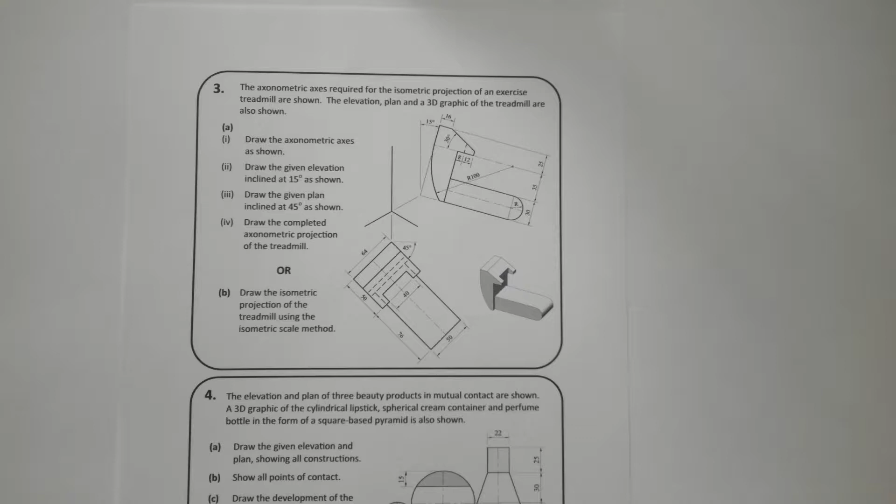Okay, so welcome to this video on isometric projection using the axonometric axis method. So we're focusing on 2017 Section B question 3. So the isometric projection of an exercise treadmill is shown, okay, and the axonometric axes are required. So these here. The elevation, plan and 3D graphic of the treadmill are also shown.

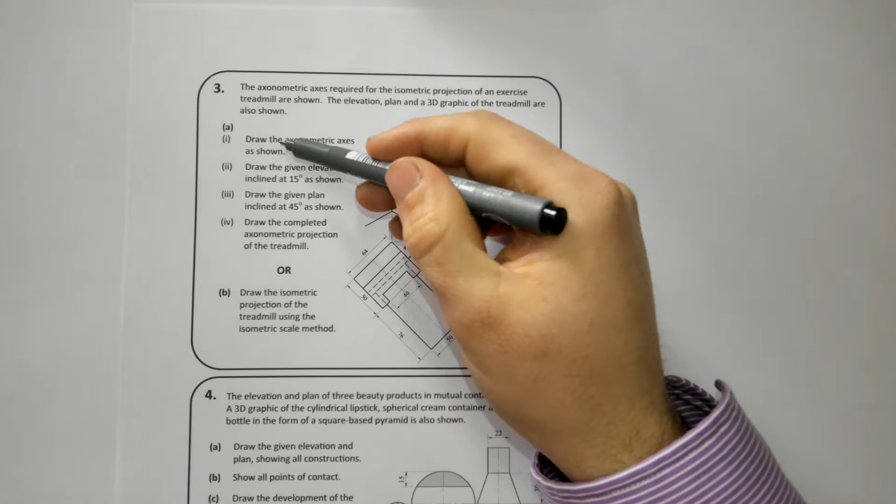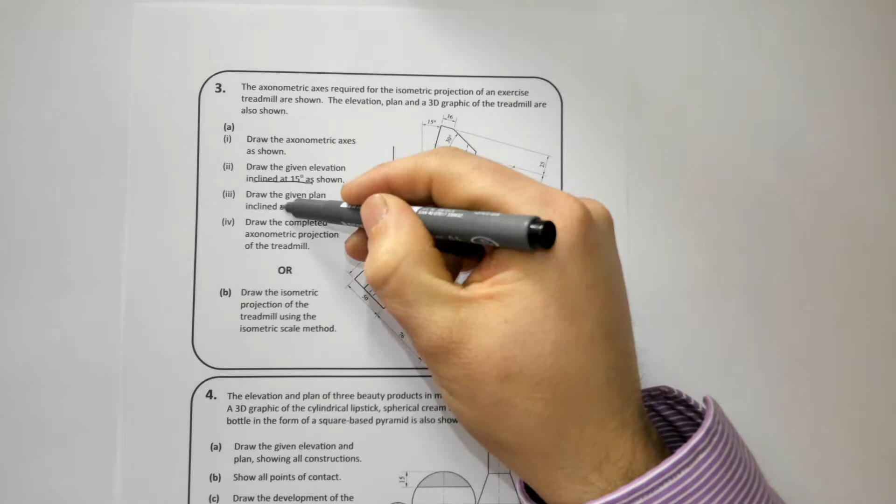So draw the axonometric axes x, y and z, draw the given elevation inclined at 15 degrees as shown, draw the given plan inclined at 45 degrees as shown, and part 4, draw the completed axonometric projection of the treadmill. So we'll deal first and foremost with the axes. Okay, so our y-axis just goes vertically up our page. Our x-axis is going at 30 degrees and our z-axis is going at 30 degrees the opposite way.

Now, okay, I'm going to set up the views. I'm going to measure down 25 for the bottom of my equilateral triangle, line across here until it hits the axis, 60 degrees here, and 60 degrees once the baseline hits the axis. So 60 degrees there. Now, what I'm showing you how to do is set up the elevation in its required position.

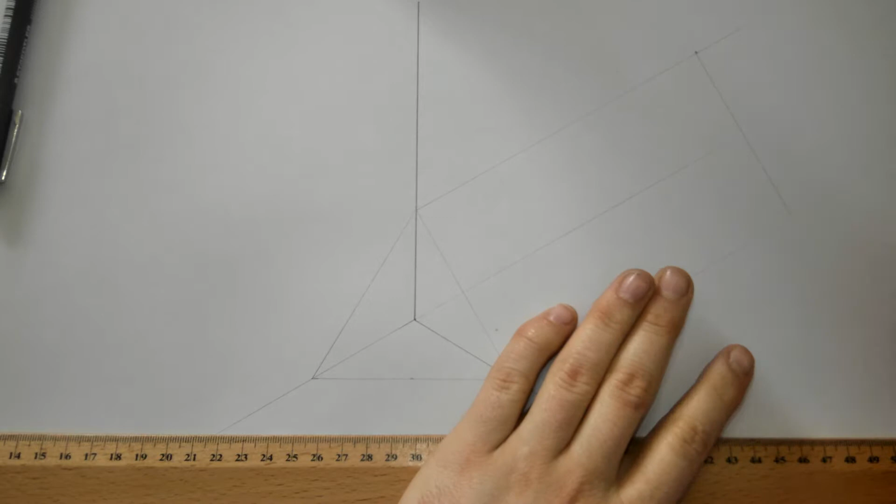So I'm taking 30 degree lines from the corners of my equilateral triangle, and I'm going to extend on my axis as well. Now, those lines can go on for any length, and I can measure whatever distance I want out from here. To make it easy on myself, I'm going to measure 140, and I'm going to draw a line that's perpendicular to here, so it's parallel to that set square, so it's a 60 degree line. Okay, now I'm going to take my compass and draw in an angle at 30 degrees.

So now, you draw in a semicircle there, and if you notice, if I drew that in, it wouldn't be meeting there at the end, and it should be. Alright, so what am I going to do to overcome it? Well, I can check my lines here to see if they're out a small bit. If they're not, what I'll encourage you to do is bisect the angle. But really and truly, the x-axis where it pierces them should be the bisector of the angle, but it's just slightly off. So here I have it there.

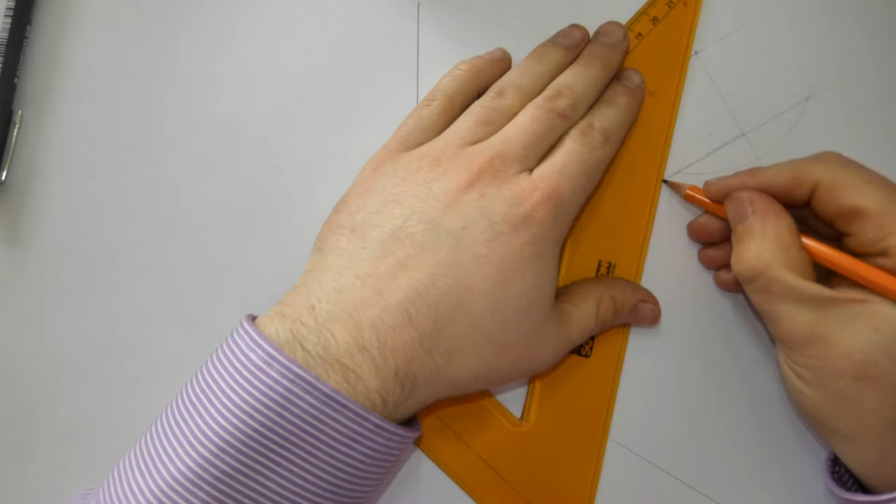Now I'll draw in my semicircle. Now, where my semicircle pierces the axis here, I'm going to join that to the corner, and this over here. So I'll move my visualizer there for you. Okay, so my elevation is going to go in here.

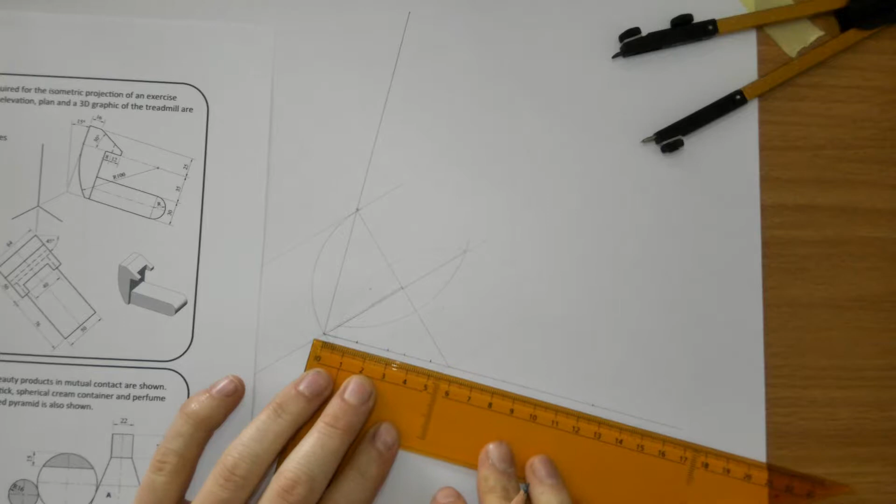Now, the length of this object is 50 plus 76, which is 126, and 50 there. Okay, we can see a 12 and an 8 and a 16. So I'm going to go 12 and 8 is 20. I'm going to go 16 from the right. Okay, so these are dimensions along the bottom. Now, you need to bring them upwards. So I'm going to bring them right up there using my sliding set squares.

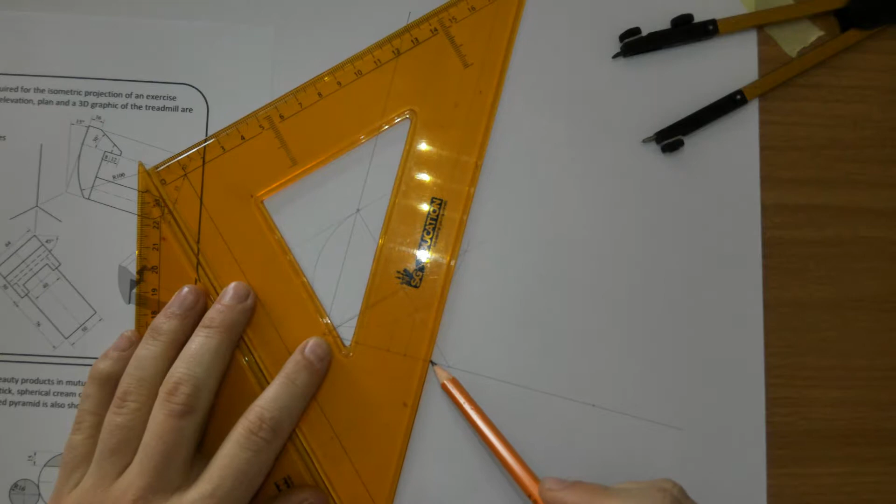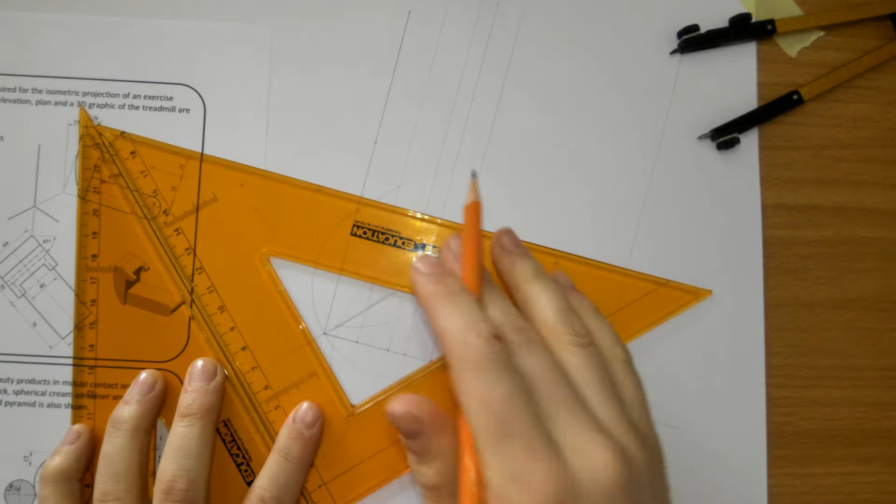Okay, now we have our dimensions here to mark along. So 30, 35 and 25. There's the dimensions to mark, and now we have to bring them parallel to the base. So I've brought them parallel to the base. Now I'm going to start heavying them in.

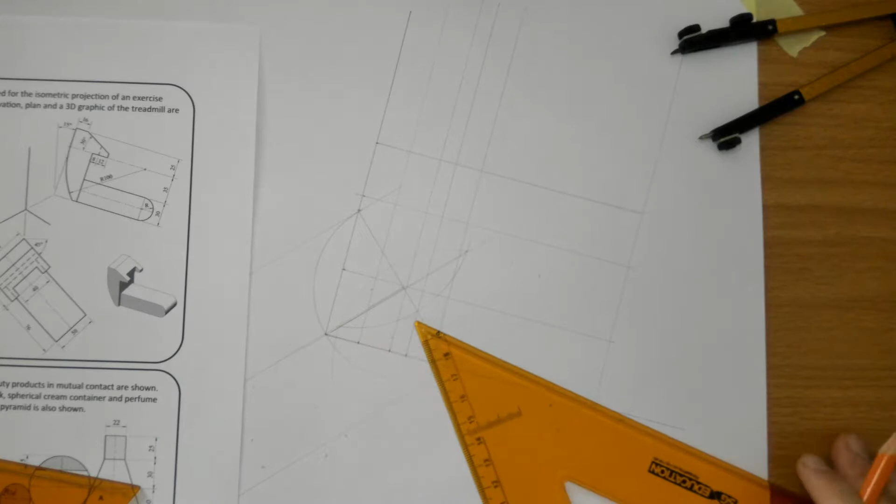Okay, now a difficult thing to do will be to find the curve. Alright, so find the curve here, but it says it's radius 100. So I'm going to measure over radius 100 from here. I'm going to take my compass. There. And, oh, sorry, I've moved my compass there. There we go. That's the arc there. I'll get rid of that. So there's the arc drawn in.

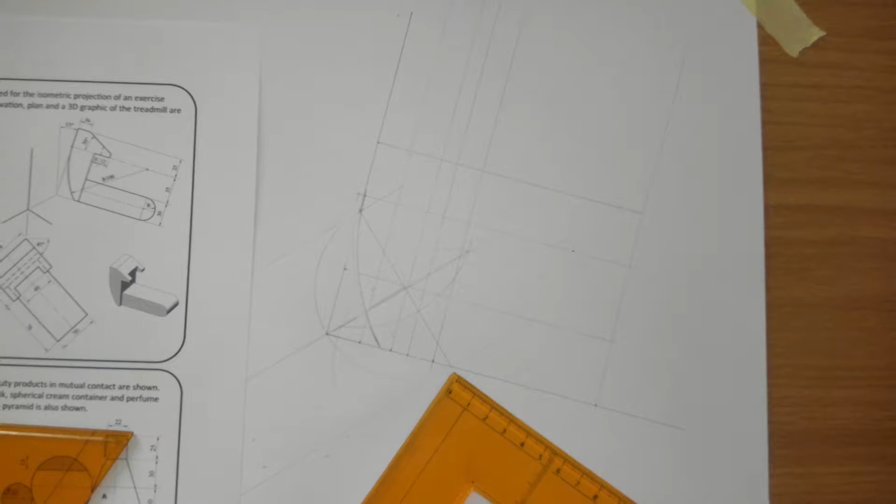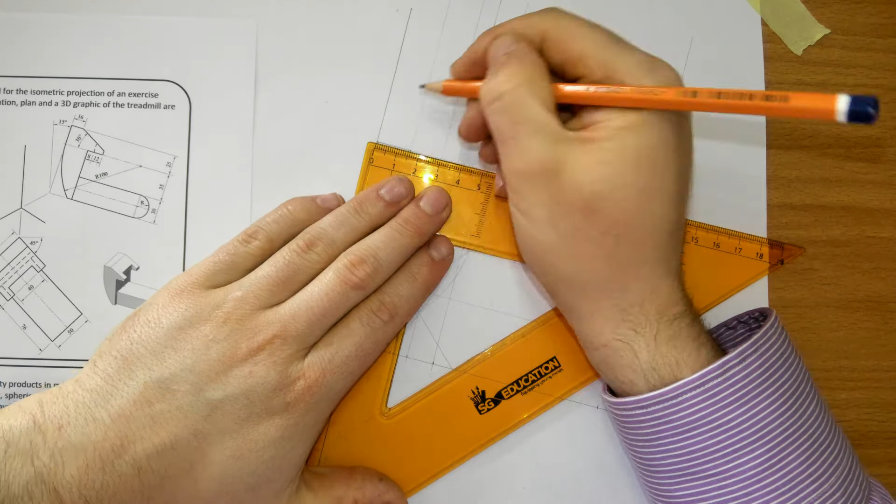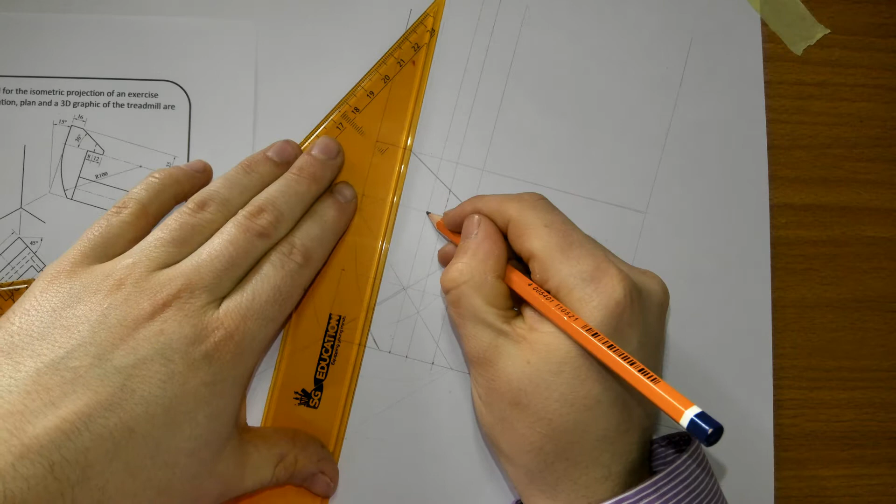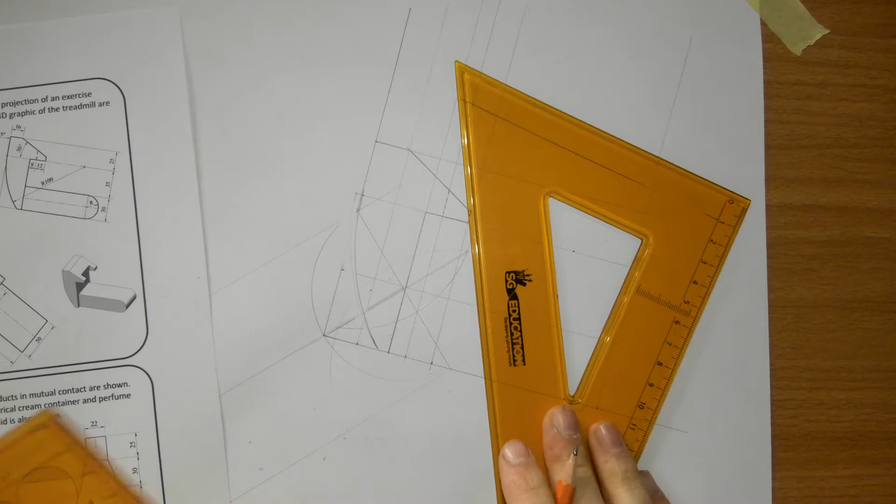This is heavy. Okay, now we need to figure out where this curve is. The diameter is 30, so this center point is in 15. So I'm going to measure in 15. So there it is there, the center point. There. And now we'll get going drawing in the curve.

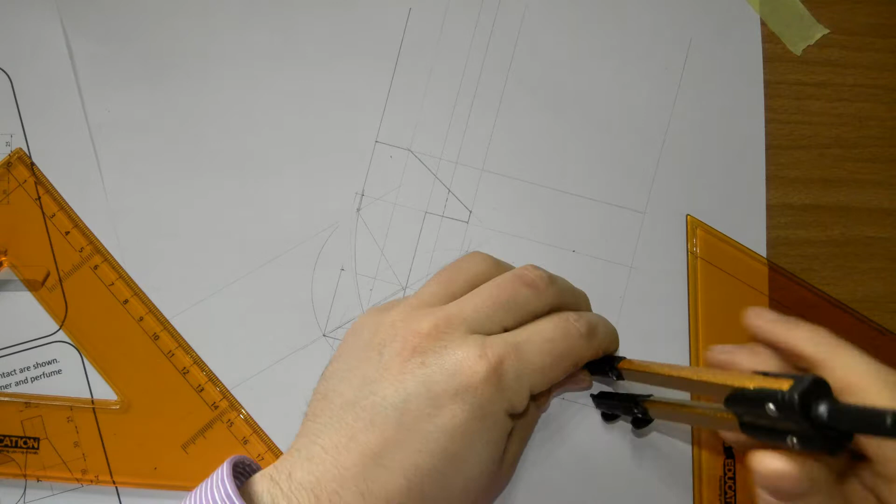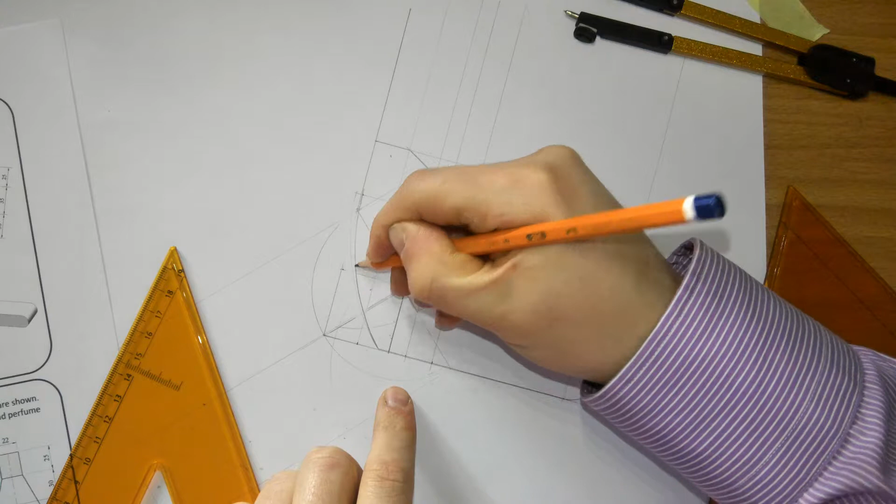So there's the semicircle drawn in. I can heavy in this line here, from here, and I'm just going to darken that with my hand to make it easier to see for you guys. Okay, so that's my elevation. Okay, completed.

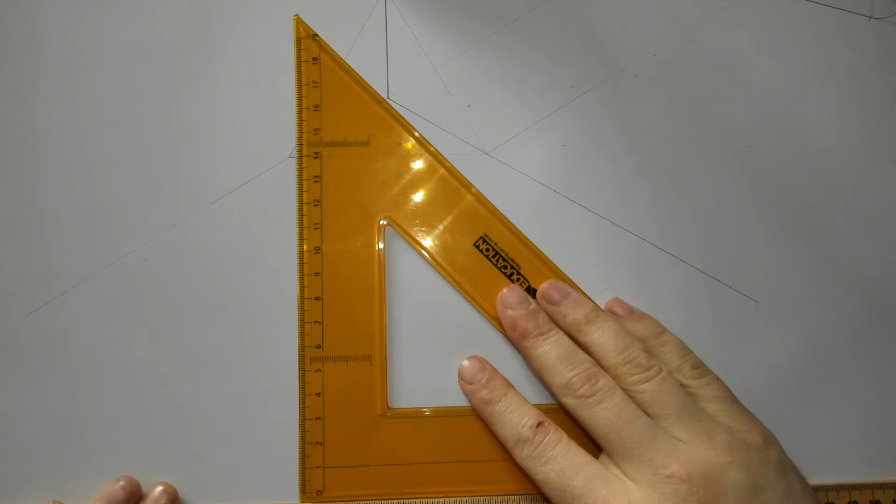Now I'll teach you how to draw in the plans. I'm going to move the visualizer and show you how to draw in the plan view. So I'm going to project the two corners of the triangle down.

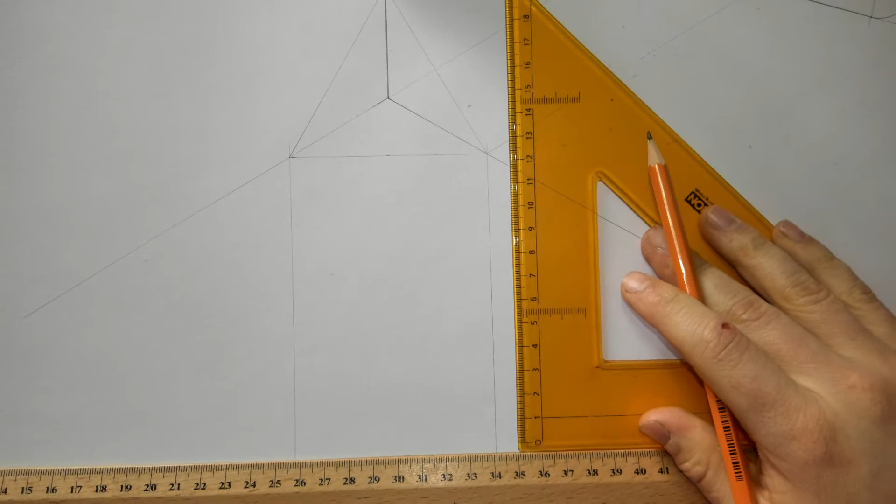I'm going to go down roughly about 8 centimeters from that line. Okay, no, I don't think that's enough. Right, I'll go down 6. So going from there to there is 6 centimeters. So I'm going to draw a line here. Okay, I'm going to bisect that line.

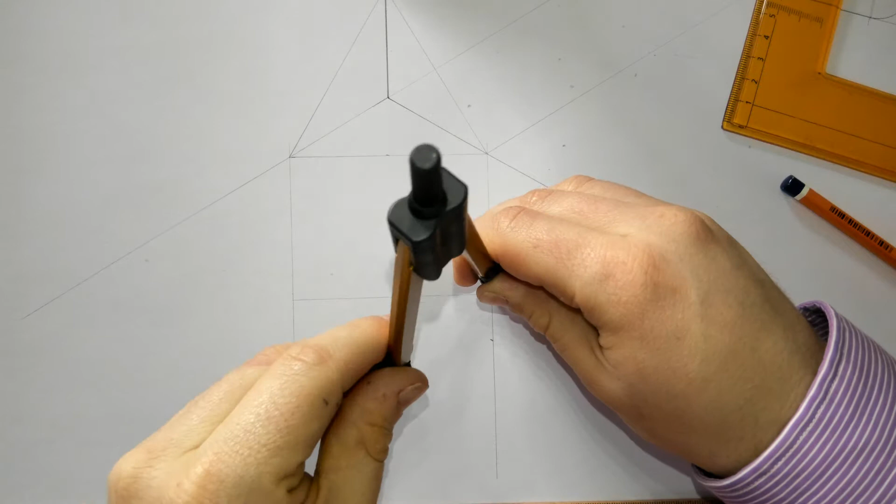Now, I'm going to get my compass here and draw in a semicircle. So this is going to be the orientation of the plan view.

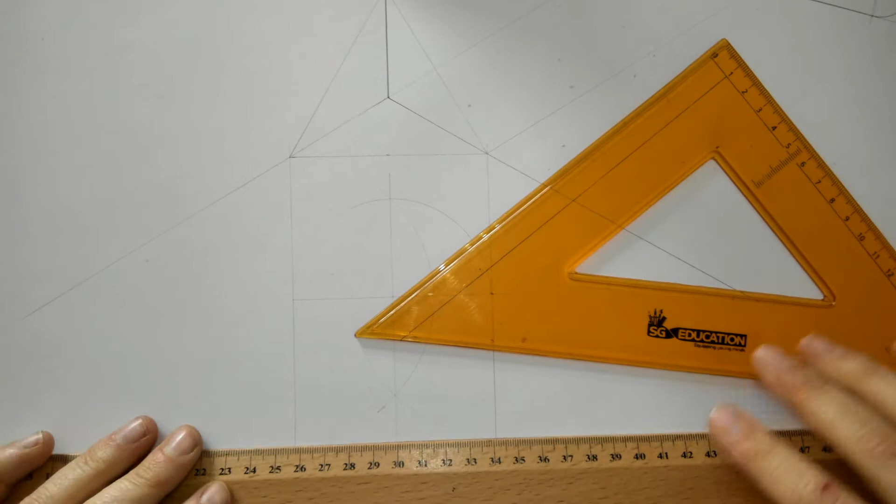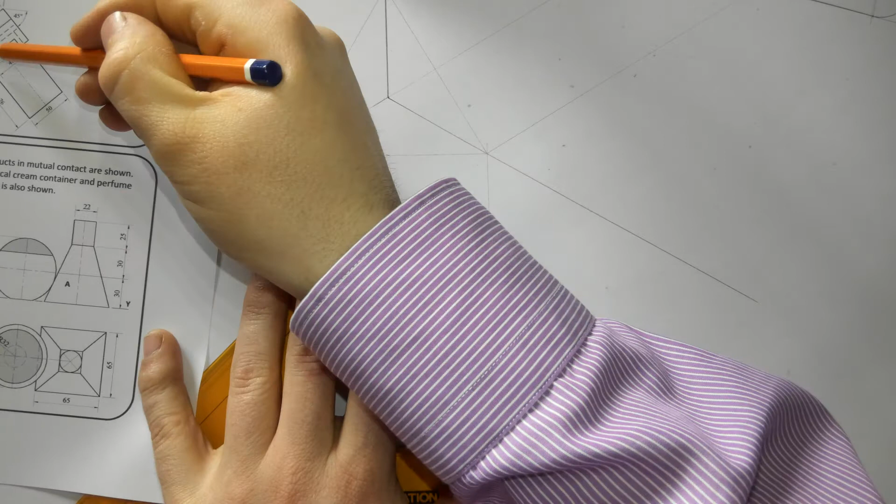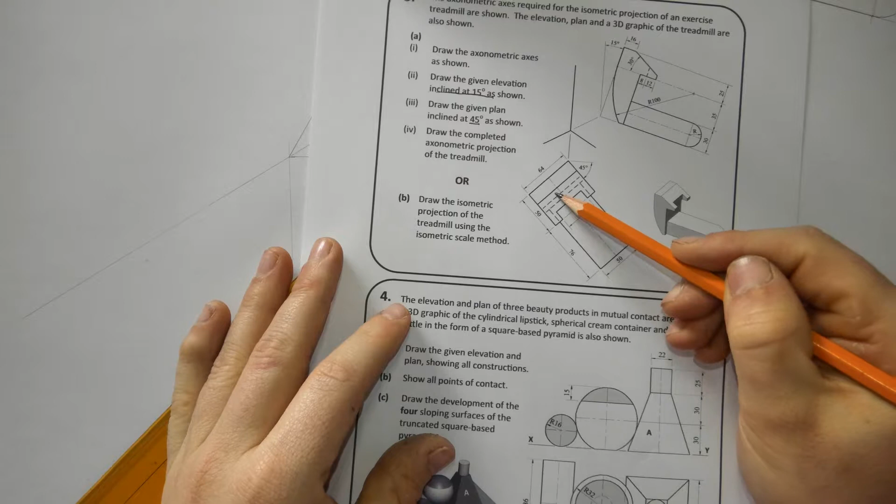So it's length 126 again. There's a 50 on it, and then there's a 16 here, and then we're going from the 50 going 12 to the left and 30, and then we want to figure out the distance between there and there, and that distance is represented by this distance in elevation.

So we go up to our elevation and we take this distance here with our compass. Okay, lift your compass. So back in plan view, we go over to our 50 mark and work 20 inwards, and then mark it right there. That's it there.

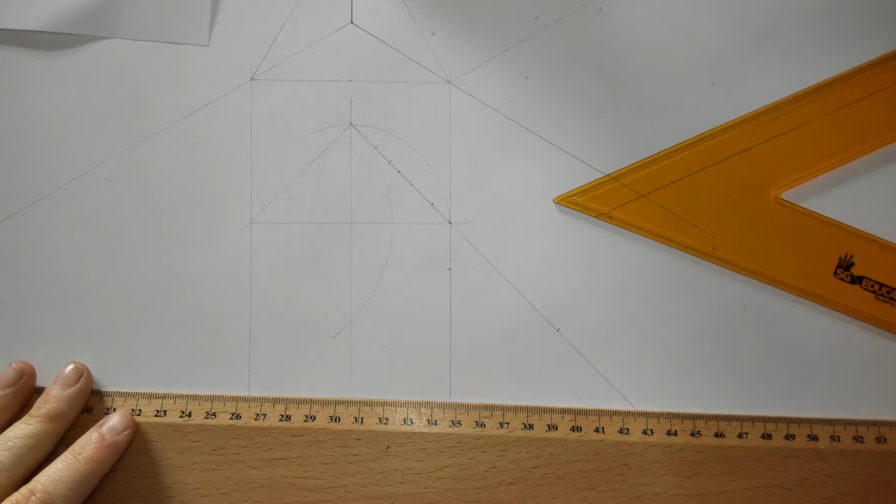Okay, now we can draw lines in for our plan view, and the width of the plan view is 64 and 50 respectively. So I'm going to measure 64 here. I'm going to find the center of it, and then I'll measure 25 either side of it. So I can bring my light lines down here.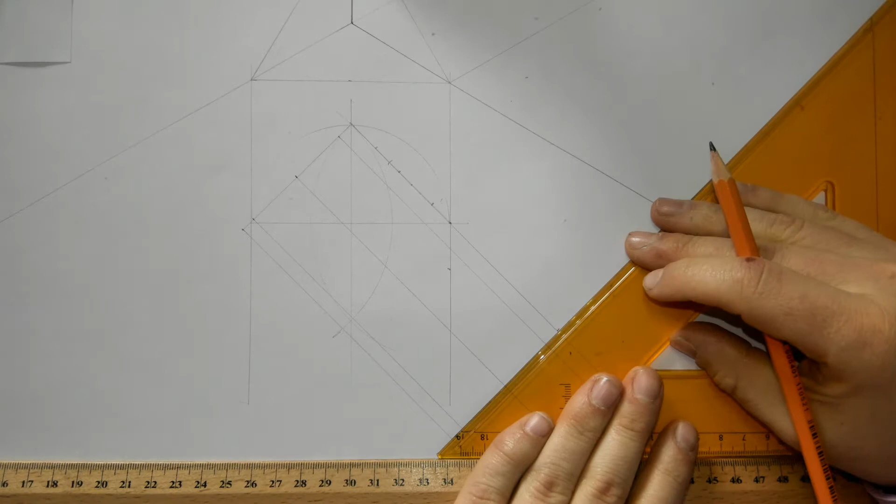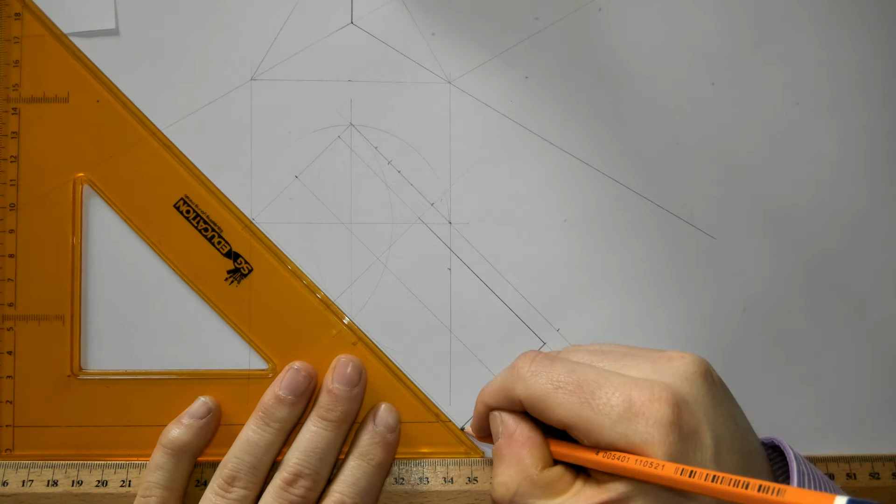Now, heavy line there. Heavy line here. Heavy line here, and then we've got a little space out here to do the 40, so 40 divided by 2 is 20.

Now, excellent. I love those students.

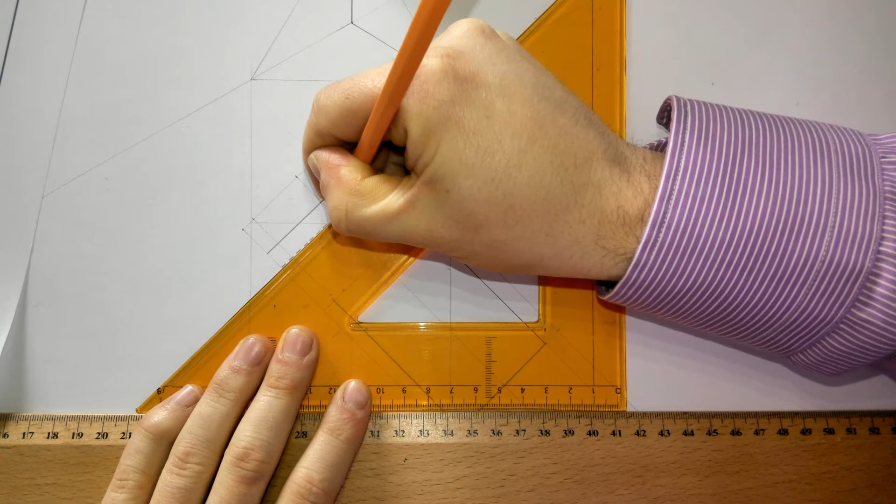So back here, I'm going to draw in these lines. Okay, this one is heavy. The underside line here is hidden. And then we have another hidden detail line. And then we have a heavy line going to the 12.

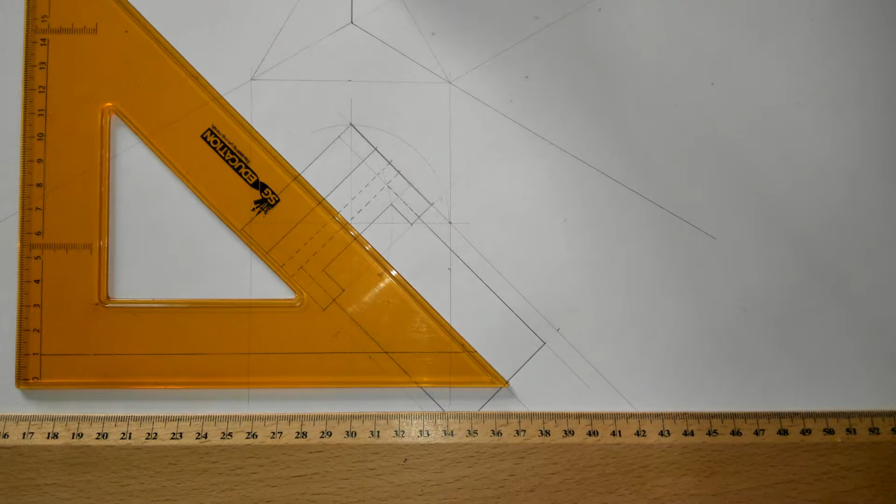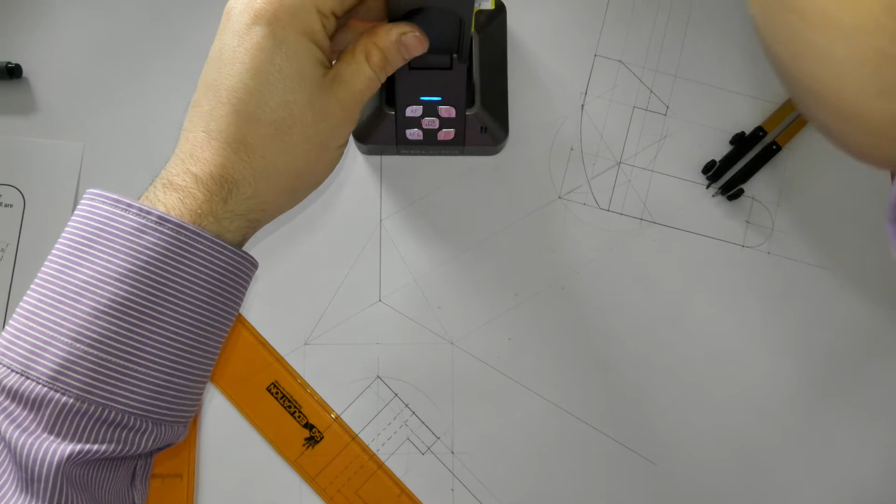There we go. And then there's a hidden line here. Right, so that's our plan and elevation completed. Alright, now we need to draw it in 3D. So I'm just going to raise this camera here. Now I'm going to pause and fix the camera.

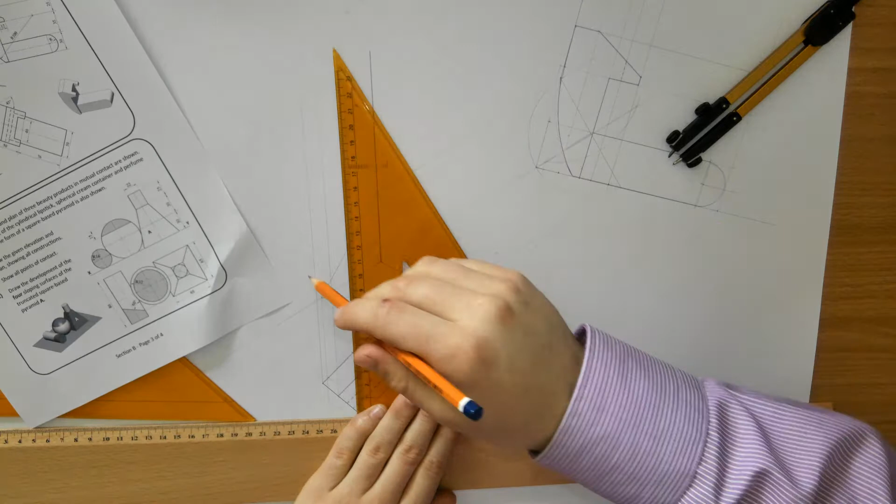Okay, so I've adjusted the camera and I'm going to start drawing the 3D model in. I'm going to solely deal with this front surface here. So I have to establish my points here: 1, 2, 3. Points in plan represent the whole face. So I'm going to bring the 3 points I want up from plan.

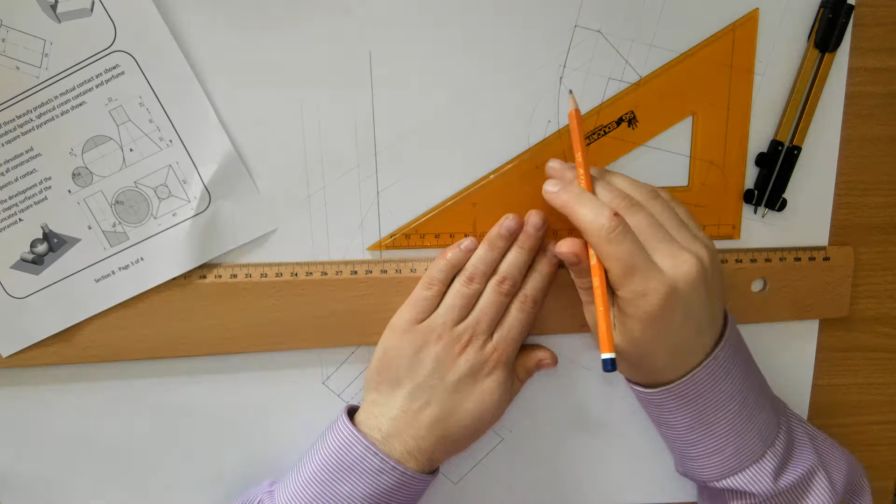Now I'm going to bring these 3 points down. So now I have 3 points brought down. So look, when these match together, there we go, these and these. So I'm going to heavy them, and now I've 2 lines drawn there.

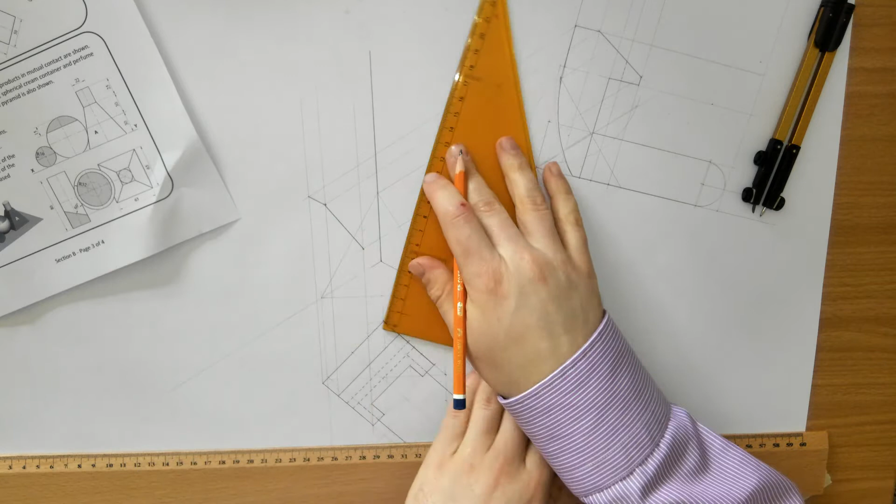Now I want to get a bit more complicated to get that bottom point there. So I'm going to bring this one right down and heavy up here. Now I'm going to bring this point down here, and its hidden detail position in plan is this one here. So I'm going to bring that one in plan straight up, and then we can connect them together.

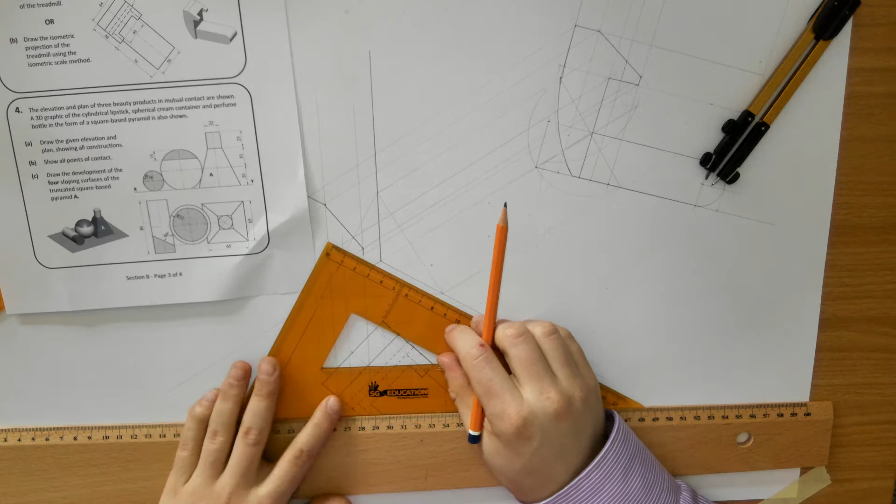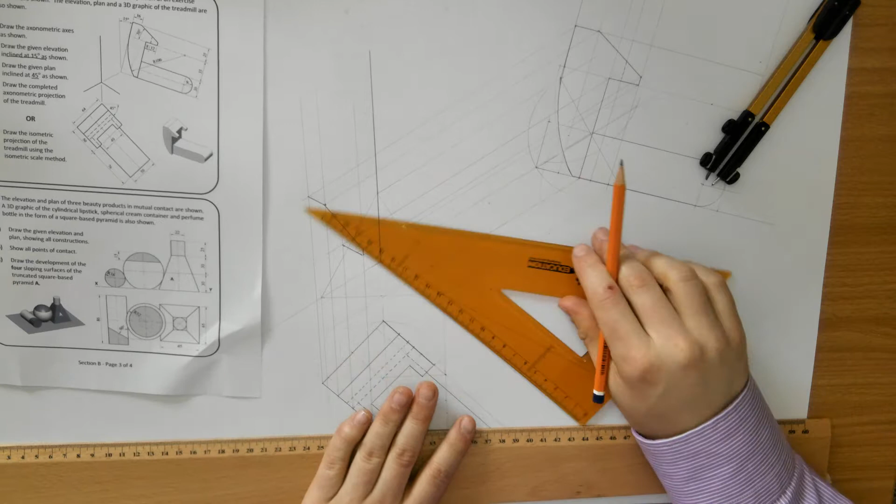So there we go. Now I'm going to try and get this line in 3D. So that's it there in elevation. So I'm going to bring this straight down, and then it's already brought up there from plan, so I can literally heavy in from there to there. Okay, and if I want to get this very small bit in 3D,

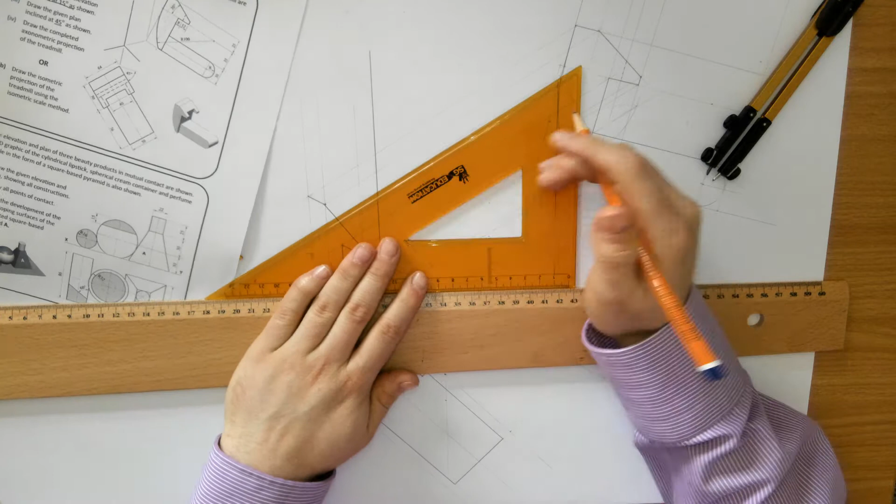bring the point down, bring its position up from plan, which is here, until they intersect, and there you have them. Okay, now I'm going to bring this point down. Okay, that one is brought up already.

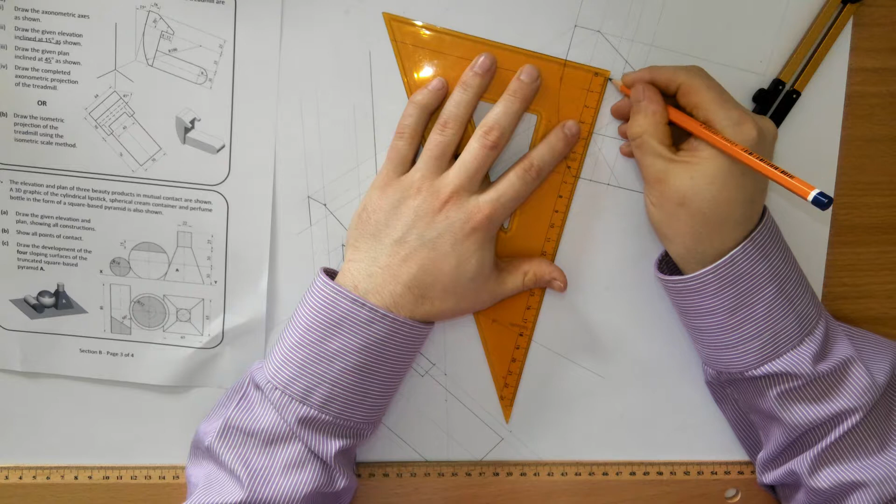So now I have everything on that face but the curve. So I'm going to teach you how to do the curve right now. Okay, we're going to establish a series of points on a curved surface. So, because we have an elevation and plan, we're going to mark along here at the bottom, every 5. So 5, 10, 15, 20, 25.

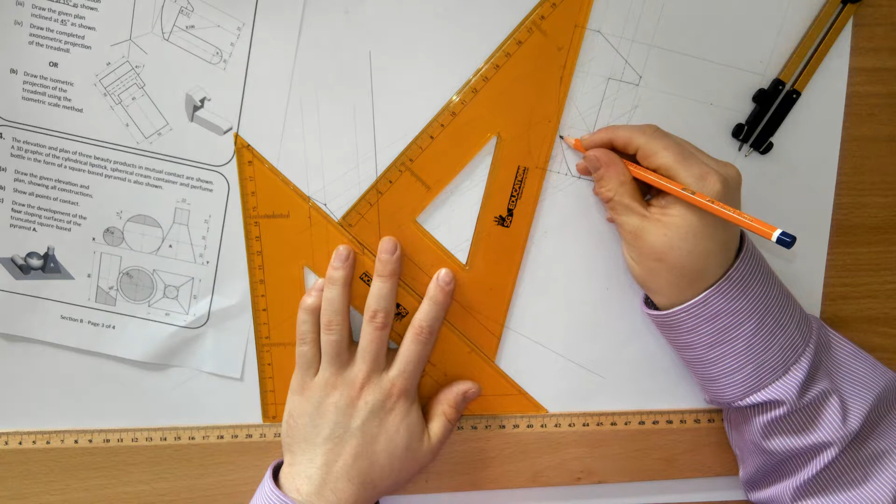Alright, so I've marked those points there. We're going to bring the points upwards until they hit the curve. Okay. So I'm going to bring them up until they hit the curve, like I am there. Now, if we've marked along 5 here in elevation, in plan view we're marking along 5 here. So I'm going to mark 5, 10, 15, 20, 25.

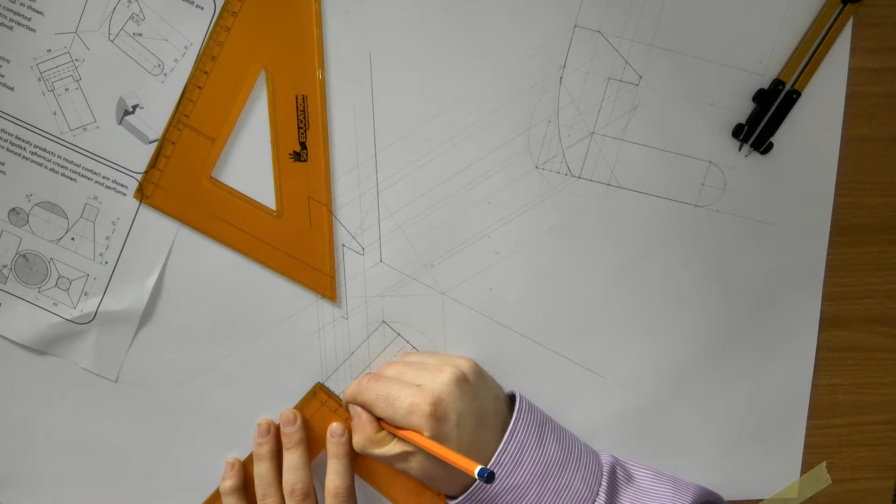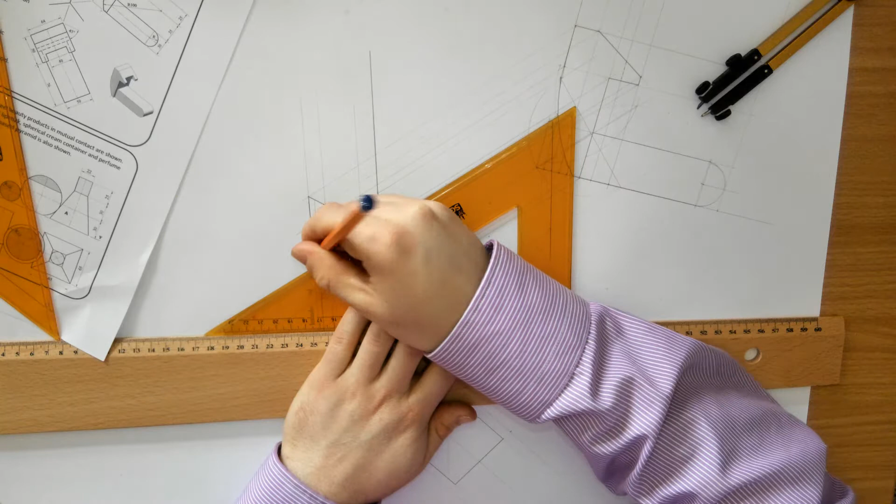Now I need to bring them up respectively. So the first one we bring up from plan, the first dot. The first one here from elevation, we bring down. So we bring that down. And that's the point on the curved surface. Now the second one we're going to bring up, and we're going to bring the second one down. So there's our second point.

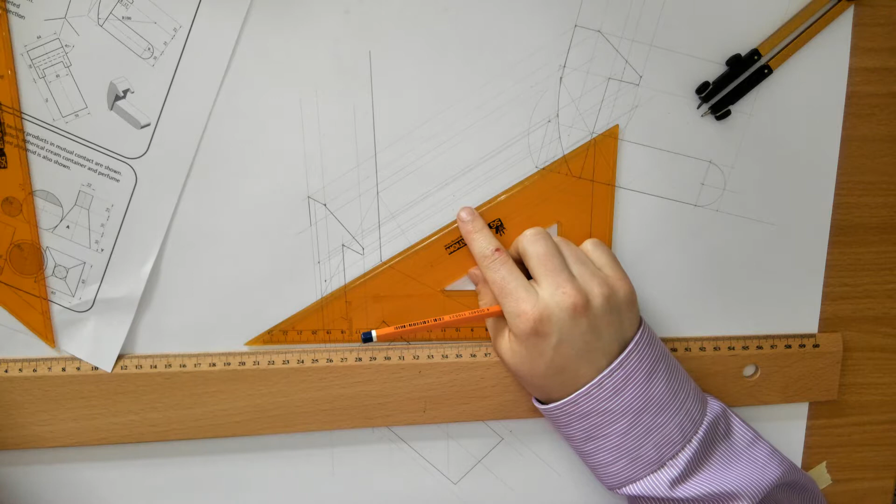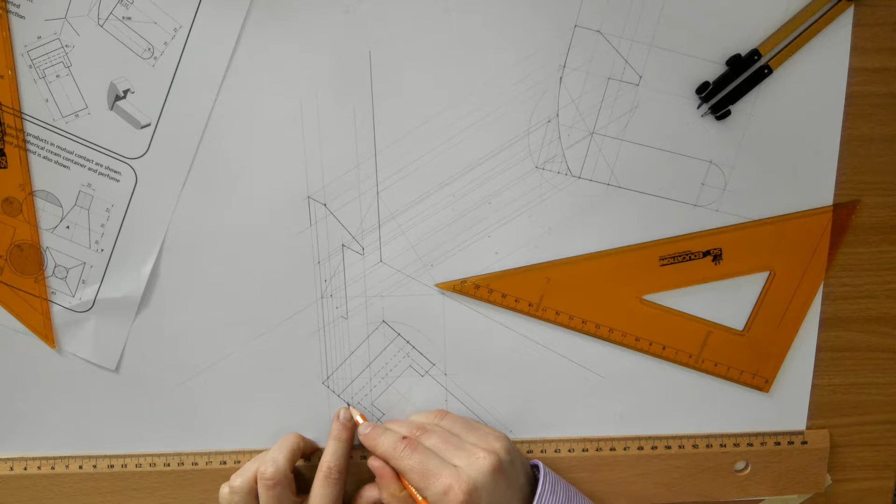Now the same with the third one. We're going to bring the third one up and the third one right down. Now we'll do the same fourth one. So the fourth one is here. And that's it there. And the fifth one should be bang on there, the hidden detail line. Okay, so we're going to freehand sketch them in. So that's the one curve there.

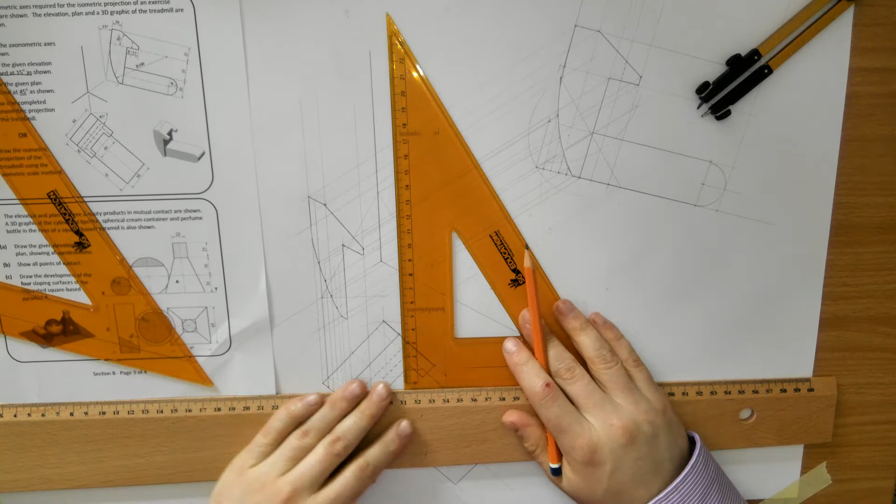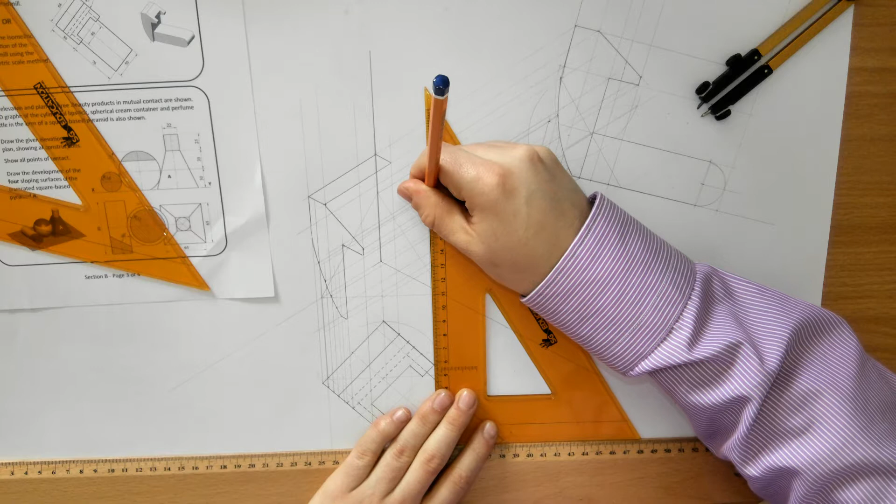Now I'm going to do the top surface here. Okay, so there are my two lines brought down. So I'm going to bring just these two up until they intersect each other. I'm going to connect them together. Right now, this one here, I'm going to bring a point up and have it between their relevant lines. We go and join them to their relevant places. So they should join here. Now I'll deal with the cutout.

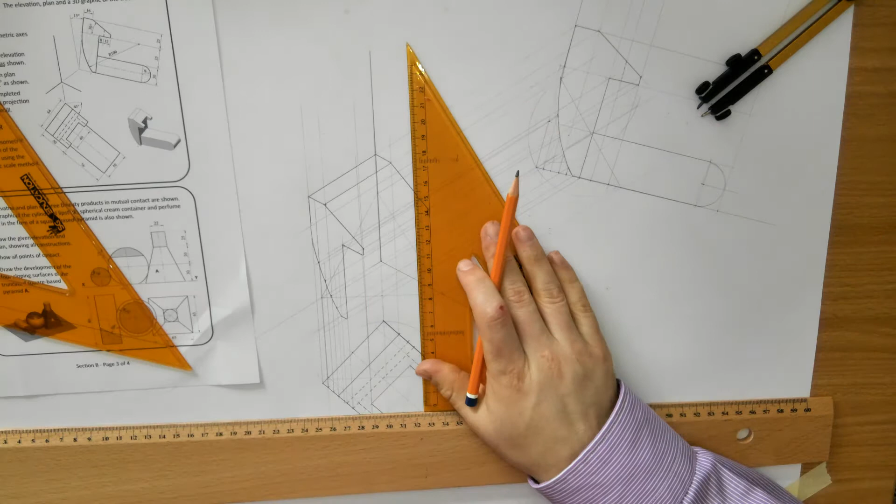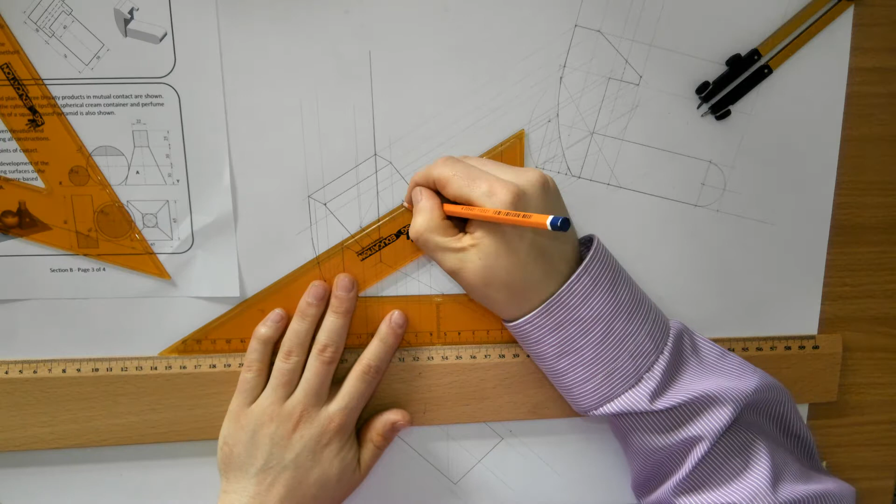So bring that point down. It's where they meet. Okay, and then the point here they meet at. So I'm going to join them together. Likewise over here, let's come up, put it up there. And then we can join these together. And we can't forget now to do our inside bit.

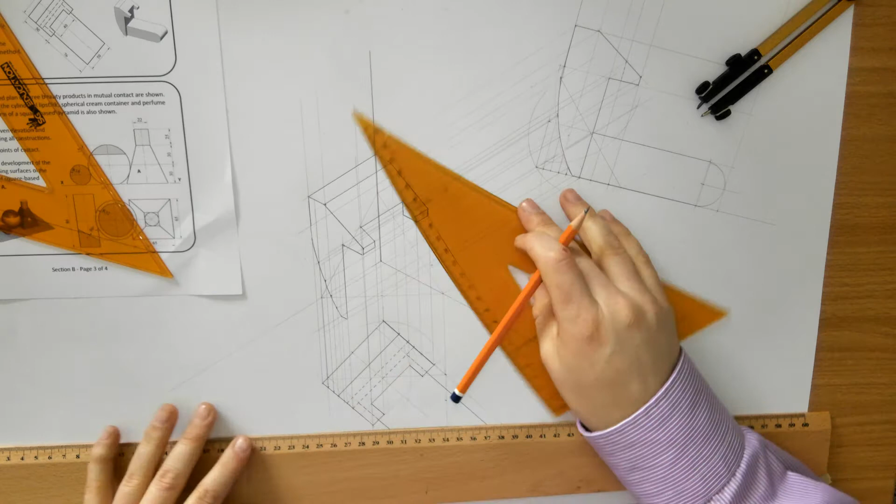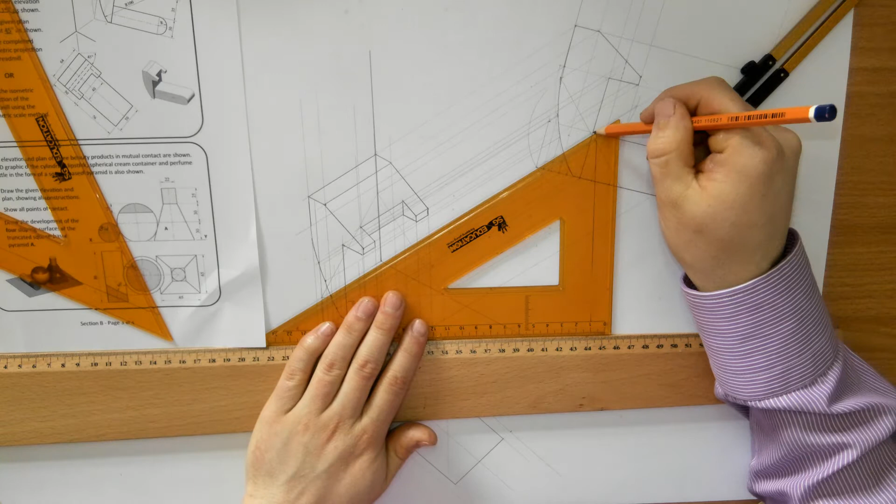Right, now we're going to deal with this body here. So I'll bring this point down here. Okay, it's going to start from in here, so this inside point right there brought up, that one brought down, there. I'll double check it. So there we go.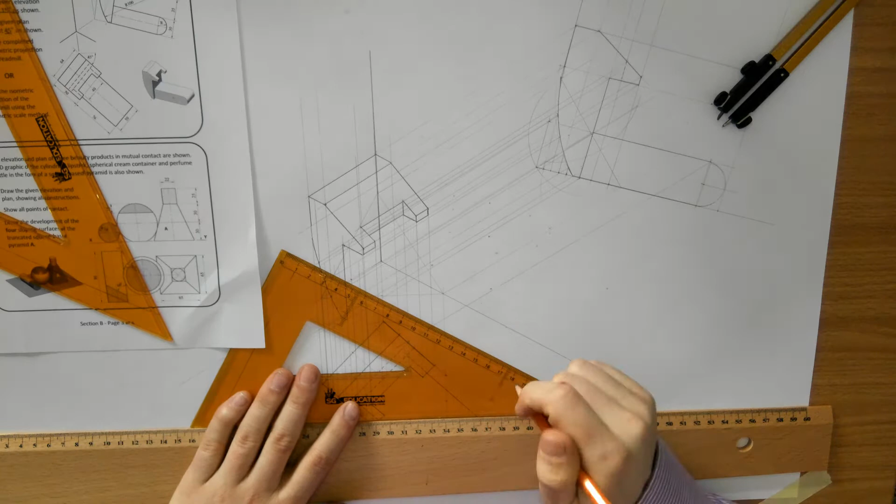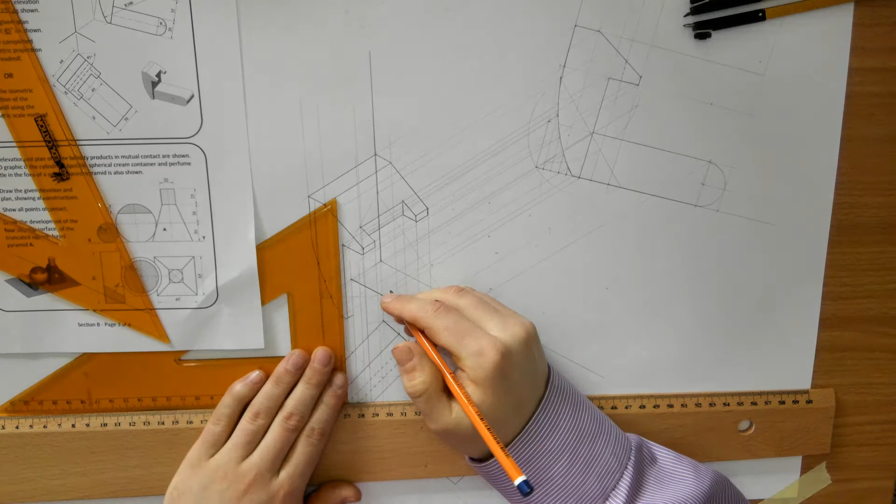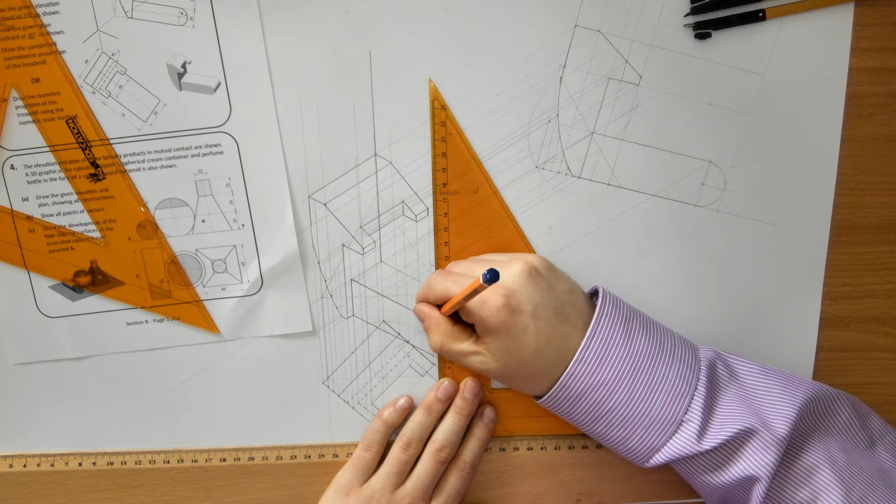Right, so that's going to stay heavy until it hits the start of the curve here. That's not right there. Oh yeah, never mind. So there we go. Heavy to there. Down there. And then over this way, marking 15 down here to establish the end.

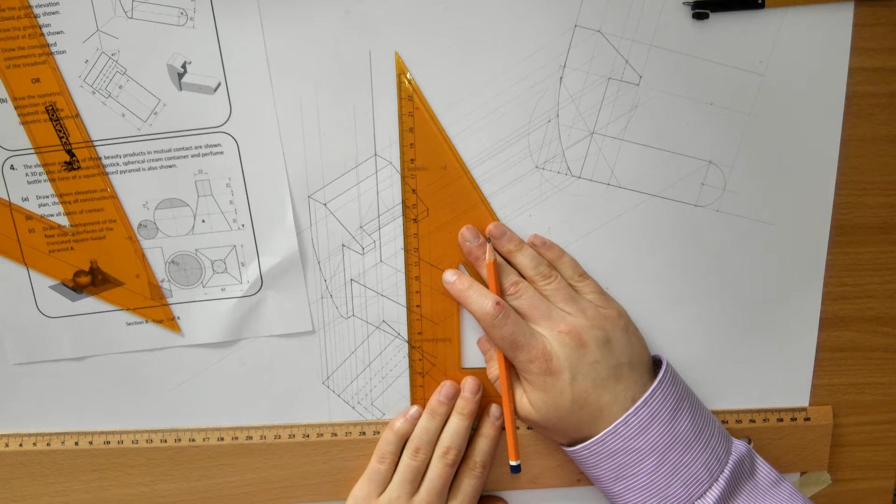Now I can bring this back to here, and I can bring this line down now as a heavy line. So now if I want to do the curve, we approach the same idea. We can divide this into, we'll say, 60-30. Right, I'll do a quicker way.

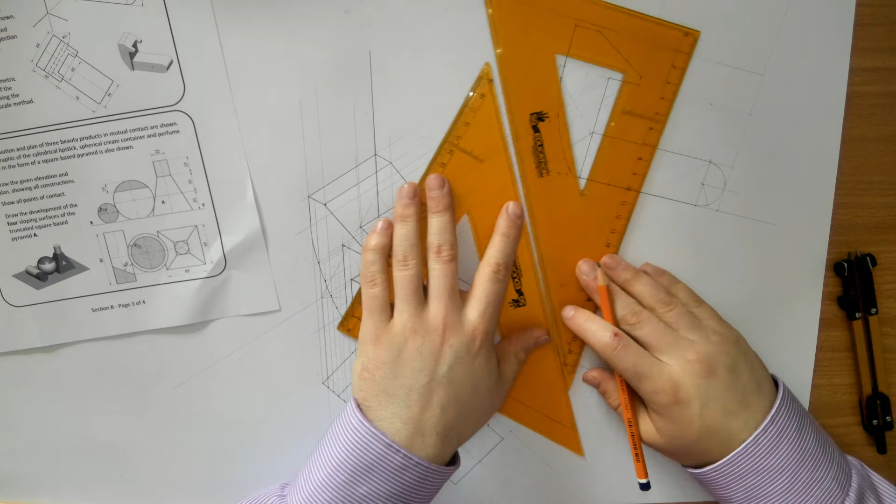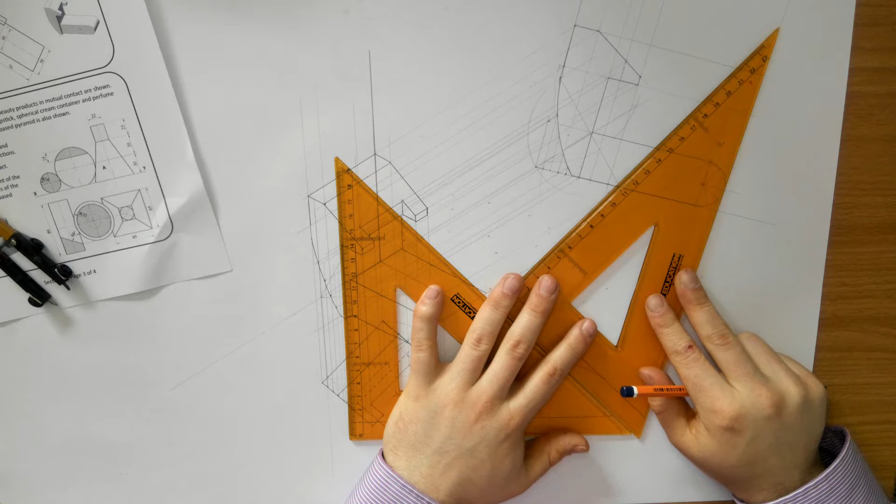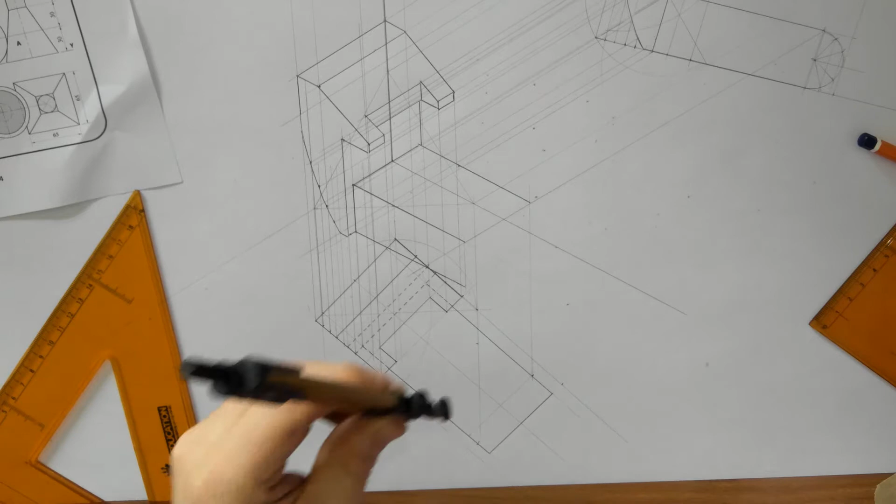So marked in that curve, need to get them on the base. Okay, now we need to get it over here down at the bottom. So from there to there is 15. I'm going to draw a light line here. Okay, now get your compass. Zoom in here. Set your compass here to this distance. Lift your compass. Put it down here in plan. For the first one, then for the second one. Now bring these points straight up from plan.

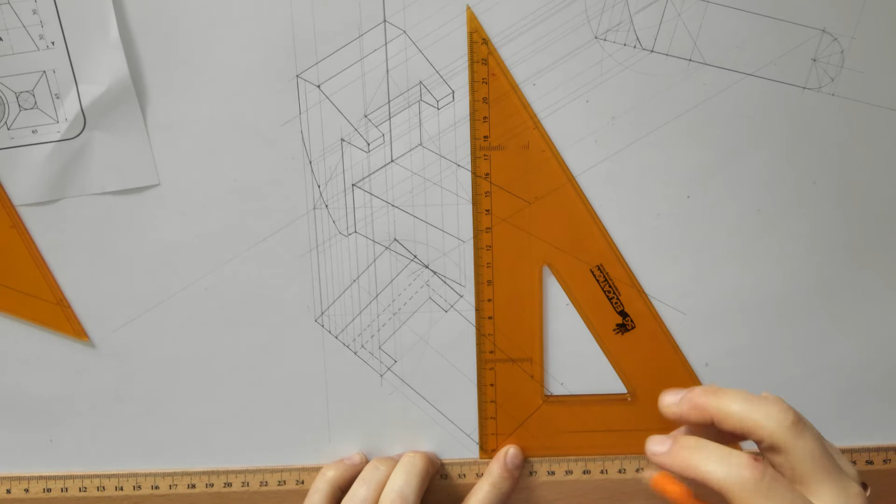Okay, now we have to bring these points straight down. Right, so you have to be clever. So the first one here up from plan is going to represent these points here. Look, them ones. That one and that one. Now the second two, straight up. These two brought straight down.

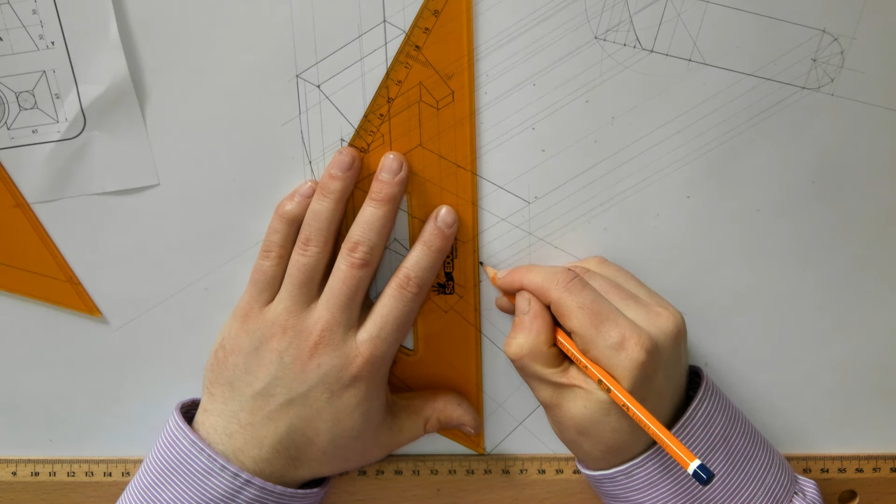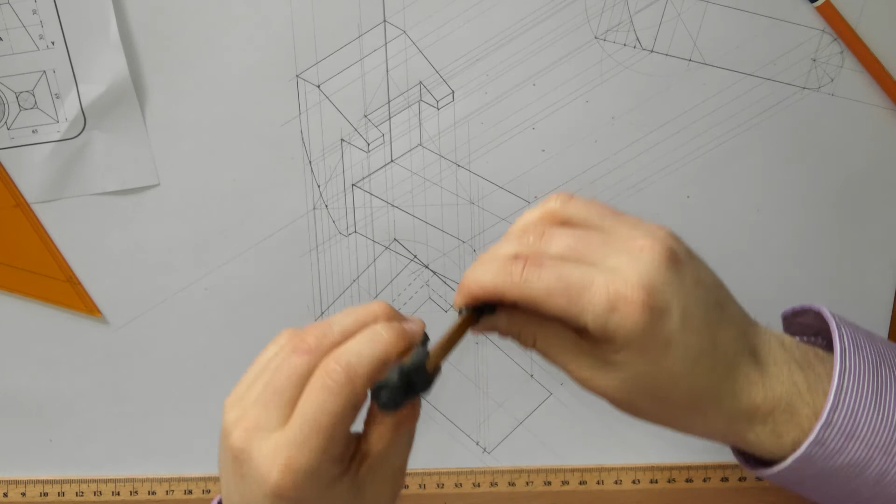And then the third one brought up. This one brought down here. Intersect. And here's our curve. Okay, that will sketch in properly in a moment. I'll just lightly outline it now. Now to get the curve on the other side, set your compass from here to there and mark like that. It's quite an effective, pacey way of doing it. Now I'm going to untape the sheet, pause the video, sketch in the curve, again heavy everything in.

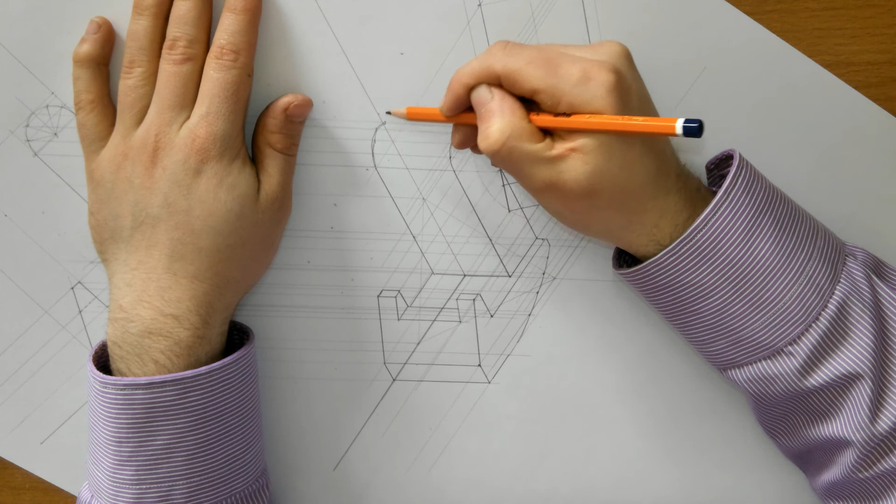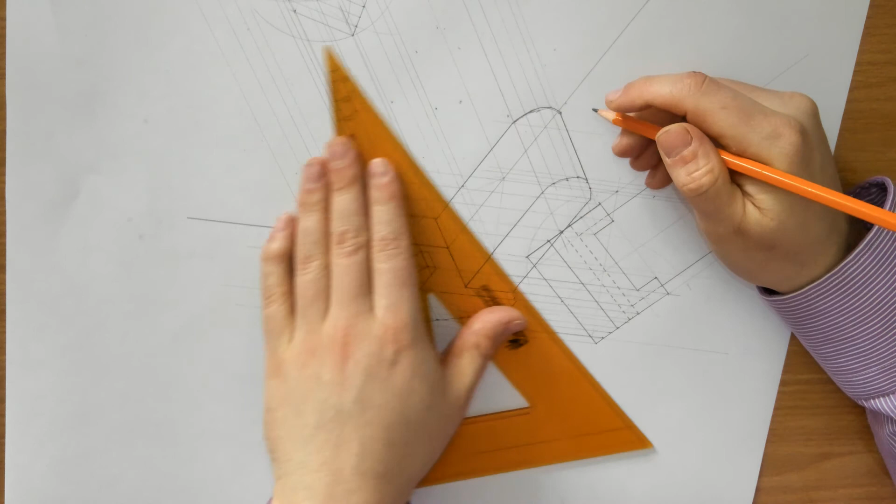So sketching the curve in, keep your hand inside the curve. Okay, now that point to me should be more over there. So keep the sketch nice and neat. Use the points as reference. If you feel like a point is in the wrong position, just ignore it. Keep the curve right. So for example, that sort of looks right to me. Heavy in that. And there's the question complete.